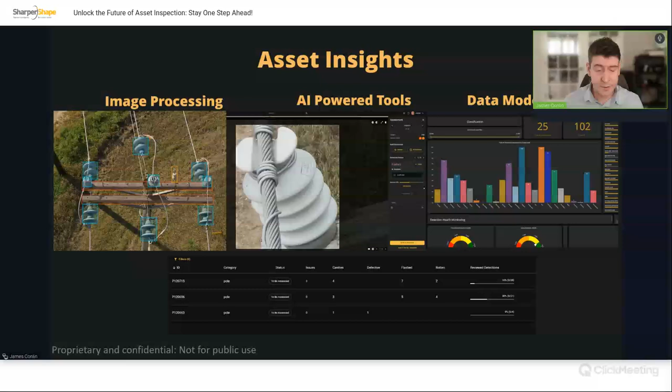All right, so here we can actually just get a little preview. You know, whenever you see any ML or CV models, you always want to see those bounding boxes. We have, like I mentioned, 3 sort of pillars here: image processing, tools for end users, and updates to the data model. And that Sharper solution sphere.

So here in Sharper Solution Land, we operate as a software vendor for some of the US and the world's largest IOUs, so investor-owned utilities, and smaller utilities, as well as their vendors. So if you are a drone service provider, you capture images, you're looking for a sort of end-to-end solution, you can lean on us to help you organize your operations, actually operationalize this data at a huge scale. We've got a really large offering. We've got a very wide and deep platform.

So it's nice to sum them up and think about them like this, I think. For workflows, these are tools that help utility workers and your vendors get jobs done. Key technologies are our utilization of cloud computing and our whole architecture that allows us to deploy complex data analysis pipelines at scale. And solutions for housing and structuring and accessing data. Realistically, almost all Sharper Shape solutions live in this section, a warehouse that stores, structures, and serves the data, as well as the actual interfaces that users deal with when they're accessing our platform.

But I do want to highlight it here because it's going to become useful. We are built currently on AWS, so it's not a huge task to roll it out somewhere else. We do have integrations with GCP and Azure coming soon, but right now we are AWS.

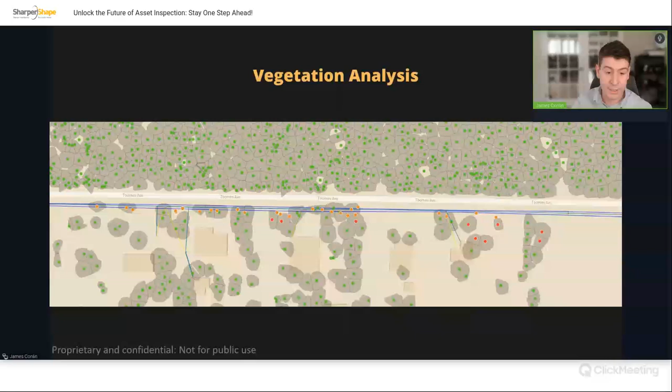So SharperShape was actually founded... We'll go one more and look at the key technologies. Yeah, SharperShape was actually founded out of the Geospatial Research Institute in Finland about 10 years ago. We came up with a proprietary algorithm for tree segmentation in LiDAR point clouds. So every green organic cell looking structure here is a tree. We've been used to deploying these models at enormous scales now for nearly 10 years.

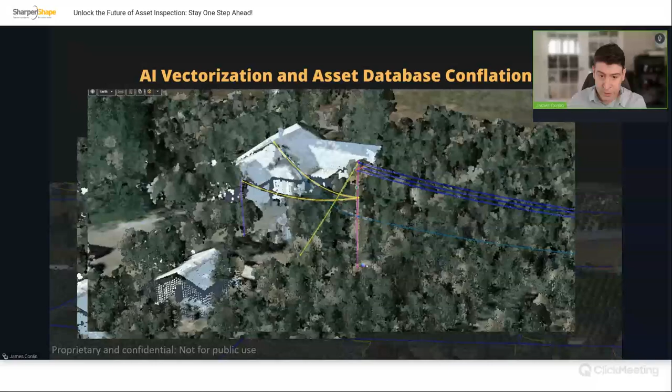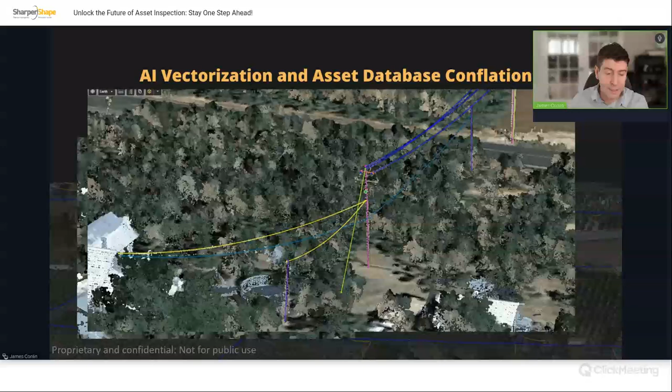And veg analysis, of course, goes hand in hand. Next, we came up with a solution in the auto-vectorization space. So for really fine-grained distribution assets, vector models that actually describe the as-flown shape. So you can see catenary wires, lines, service drops, even things like transformer attachment points automatically classified and vectorized.

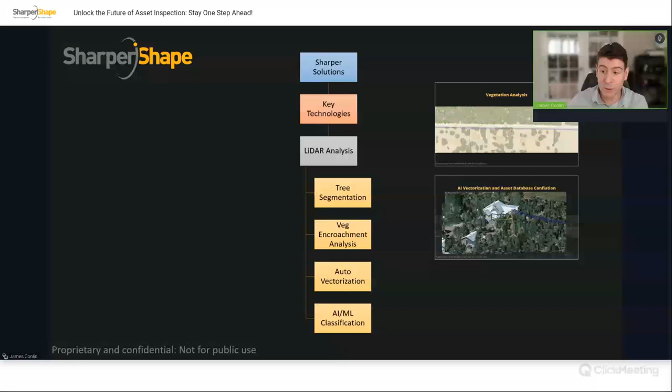Lastly, and this is where we get to show something really fun, we brought the Eclair machine learning classifier to not only our customers, but we released an open source dataset so anyone can use it to train their own sparse tensor Minkowski engine ML classifier for point clouds. And if you want to see how this looks at scale, this is something that's just always quite eye-opening for people if they've never seen this.

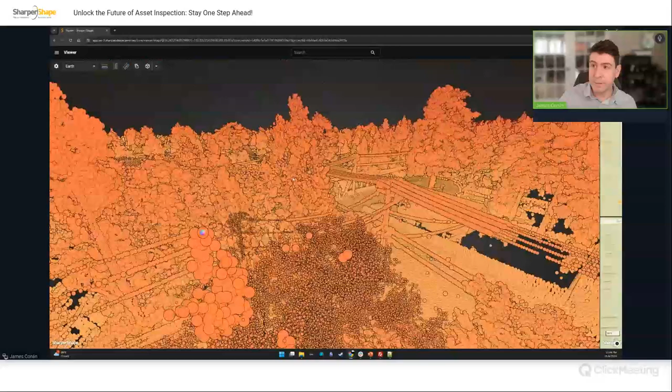So when your vendor or you guys capture a point cloud, you have just a bunch of points. Each one of these is an XYZ, right? A laser reflected off, in this case, a leaf, or over here, a power line, or over here, a house or a building. And what the Eclair ML classifier does is it separates all of these points into, I think, 31 distinct classes. When the points roll in, they're all homogeneous like this. There's some variation, but in general, they all can be visualized the same.

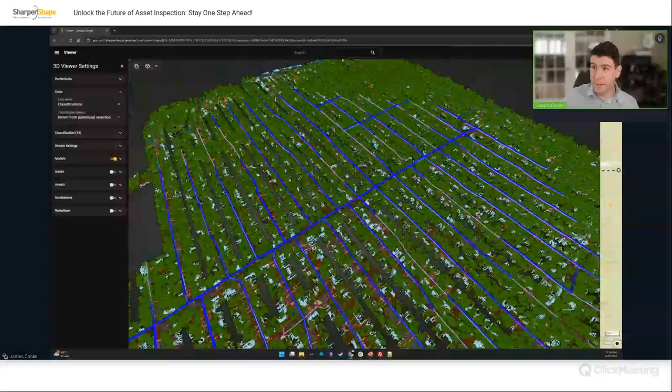When classified, you can actually see the Eclair point cloud classifier can tell the difference between primary and communication wire, can tell the difference between road and ground. Every vehicle is classified here. And this enables us actually to roll out really high quality auto vectorizers. So we can actually, at an unbelievable scale and level of detail, vectorize distribution network.

Go back one slide and take a look at the solutions for housing and structuring the data. So when you sign up with SharperShape, you get a core company. So this is your unique ID inside of the core ecosystem. All of your data is separated from every other company. And within your company, you have different projects. Your projects might be collection events. They might be business units.

You access them by going to WebCore. Some of your workers will go there. Some folks will use the iOS app that we build in-house. And advanced users soon will hopefully take part in using our API, which is a really robust and geospatially enabled API. So you throw in some geometry, you throw in the name of a circuit, and it will respond with all of the point clouds or the latest image that captures that location or that circuit. It's really flexible and it's really exciting. It's a joy to work with.

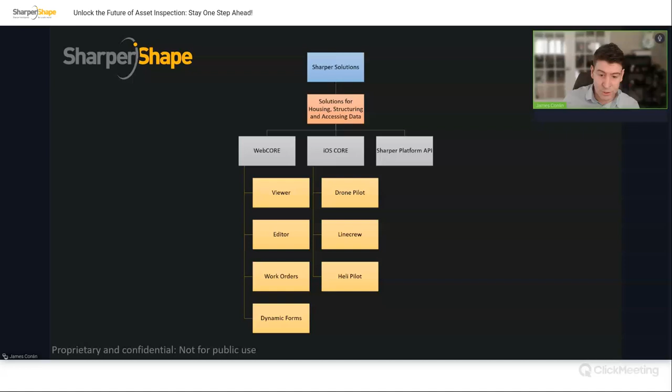All right, so this has been the lay of the land in SharperShape world for a little while. With Asset Insights, we're adding functionality to all three of these pillars. And we're looking to support our users and customers who are trying to deploy state-of-the-art computer vision algorithms trained for the sole purpose of fulfilling our vision for how ML deployment at scale should behave. Here's what we're adding, and this is what we're going to talk about for the rest of the day.

In workflows, we're adding powerful ML-empowered inspection tools and a whole suite of review tools that we'll demo live here. The backbone of Asset Insights revolves around our inference pipeline architecture, where in near real time, and I say near real time because it really takes about 20 seconds, all images are run in parallel through your project's inference pipeline. Every project gets its own pipeline. You configure it, you customize it. Results come in two flavors that we'll get into.

And then this is all supported by our detectors, which we're calling these objects detections. So an ML model with this name detected an insulator. And then another ML model classified this insulator as flashed or rusted or chipped or something like that.

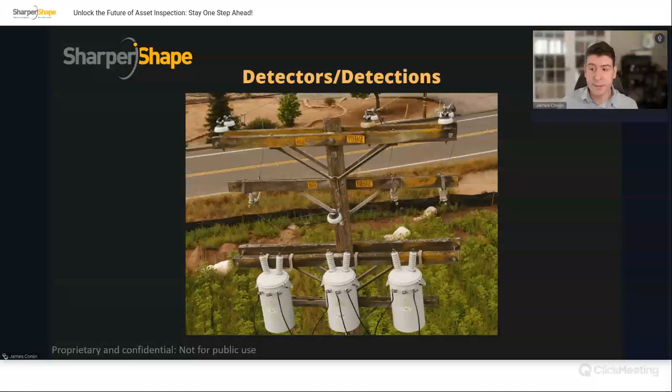Here's once again the whole platform. Asset Insights results come in two distinct flavors, and we'll actually go and talk about these now and what it means to use Core with these insights. When you upload an image to Core, the ML pipeline attempts to detect instances of each component in the image.

With one single image, regardless of whether it's from the ground or the air, our state-of-the-art model detects the utility pole and up to 26 different components. So with this image, all of a sudden, you get a pretty decent pole inventory. You got the 3 cutouts, you know how many insulators you have. You can even see some of these connectors up here.

Pair this with 3D modeling, and your pole loading or engineering and design staff can cut down the time it takes to actually do their work. These detections have a really full and useful system of references powering their data model that I'll get into later, which is super exciting. But for now, understand that each component relates to an image, and the asset that's captured in that image relates in two ways.

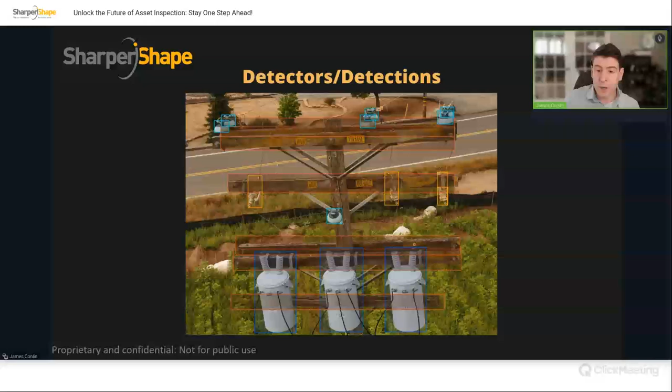It relates in terms of a database primary foreign key relationship, but also every time you upload an image to Core, we analyze the field of vision for that image. So we know where on Earth this transformer is.

The next flavor are classifiers. So your project will have multiple classifiers, and based on the component, these classifiers take your individual cropped bits of images. So we see we have three transformers from the last image, and then the simplest possible classifier just sorts them. These are healthy, these are not healthy.

And we have default models that ship with Core, and we'll talk about how exactly they work. Every transformer that's detected in an image gets sorted, right? They all get put in different bins. Here we have, of course, the classic defective looking transformer. It's very simple. This is an absolute best case scenario type of binary model. It would never be like this, but the framework is limitless in how expansive it can be.

We don't really imagine people sorting components into a binary group like this, right? Instead, what we see is a future where users in Core take part in enriching their data via inspections or labeling activities, where each component receives multiple results. So insulators are first detected in each image, and then each detected insulator is inferred upon to receive its material.

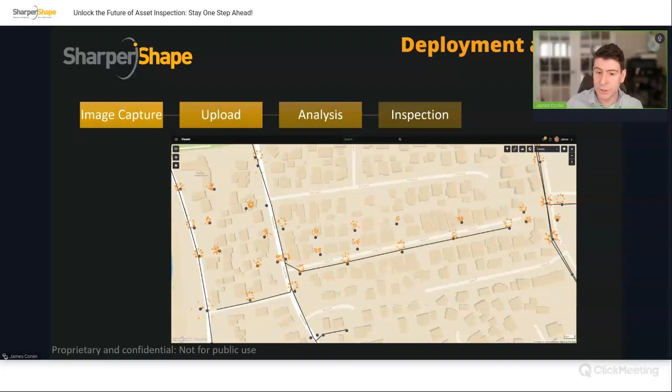So as images roll in the platform, they're geospatially analyzed and related to your network infrastructure. I wanted to show this picture. This is worst case scenario where your poles are not in the right place and your teams have to do the wonderful job of going out there and flying around a pole in reality and then figuring out how to conflate that data with that GIS database that's maybe drifted over time or was never accurate.

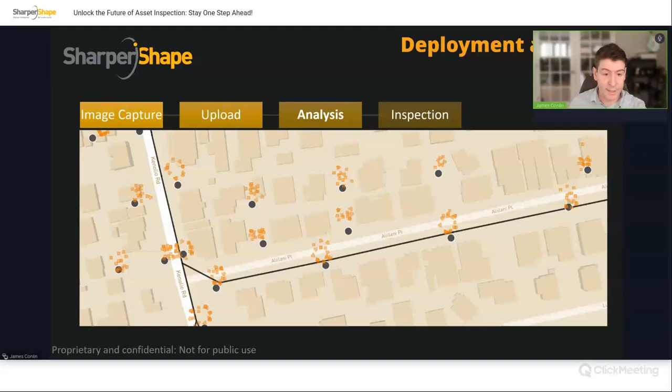So we have solutions for that as well, which is part of our DSP offering, or for utilities and large capture programs, their workers have tools to overcome this. And some customers even use these clusters of drone images for actual pole correction. So you can nudge the poles to be in the center of these clusters, and all of a sudden with drone imagery, you've enriched your GIS database from your remote sensing activities.

So I was going to show a whole end-to-end demo through slides, but we'll actually just go live into the platform now. But first of all, assets and their images enter a carousel for inspectors to look through. For every pole, the inspector looks at as many images as they need to make remarks on as many findings as there are. So we'll actually switch now to a live Core environment.

Let me find the window. All right, we'll jump to my location here in Gainesville, Florida. And when you stand up your own project, you probably want an extract from a GIS database, your GIS department, or if you are very brave and you've hired a vendor, or you are a vendor who's been told, go to this substation and walk west and fly around every pole, right? You have tools for digitization here. So what we're going to do is just duplicate a pole. I'll place it across the street from me, maybe two poles.

Now, this is WebCore. This is the editor module where you can take full control of actually manipulating the data that's in there. And just to be very nice, we'll take a look at an attribute table. This is just a default pole. We'll rename it to demo1. And we'll rename this one to demo2.

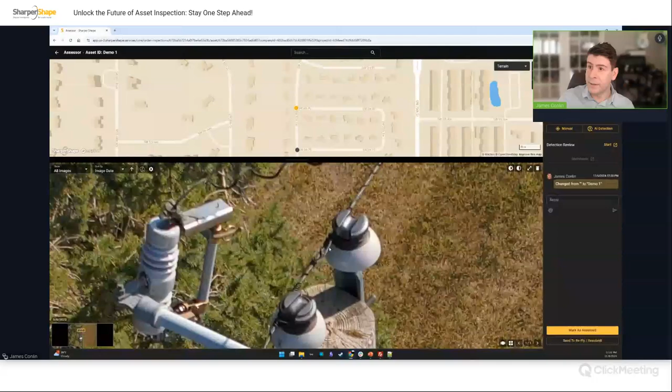The way this used to work, well, we only have one image. The way this used to work is that users come to Core and they scour the image. They're taking a look. Is that cutout broken? Is it open? The line has slipped off the insulator or something like that. The bolt's backing out. Maybe this insulator's got a problem.

Their old workflow is I'm going to click this. I find the issue. I circle it. I point here. I say it's really this one. I say it's an insulator and its condition is flashed or rusted.

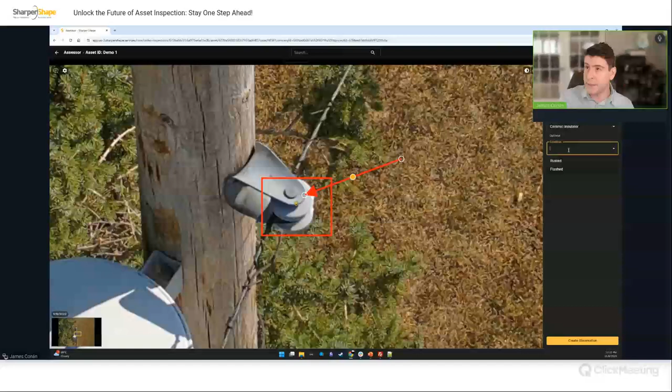The first tool we're adding to Asset Insights is actually an AI detection, just a time saver. So when you're making a remark, you've noticed that this insulator is broken, you're just going to select it. Have to refresh because the inference has just dropped. Yeah, I'm just going to select it. And now we just saved the small amount of time of drawing a bounding box. But when you're looking at 60 poles a day and you're marking up 10 issues per pole, you're saving 3 or 4 clicks per issue, and you're getting your work done faster.

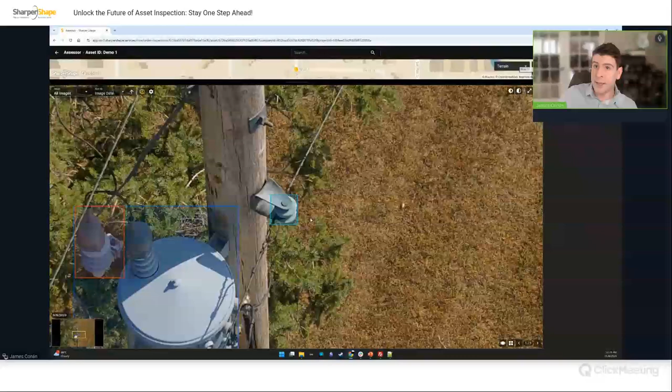Now we'll do that again. We'll actually use this transformer. Oh, no, we'll use something else. We'll use the insulator again. We'll use this one. We'll say it's flashed, sure.

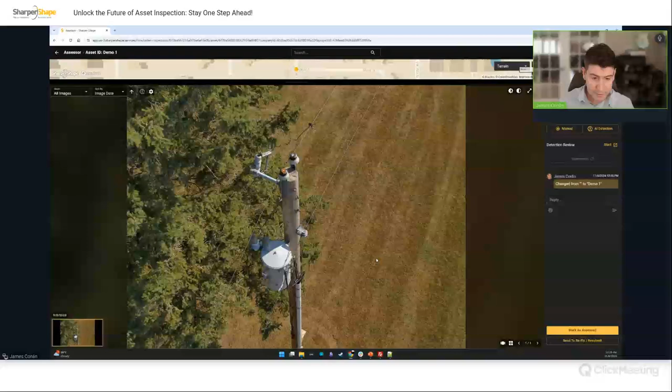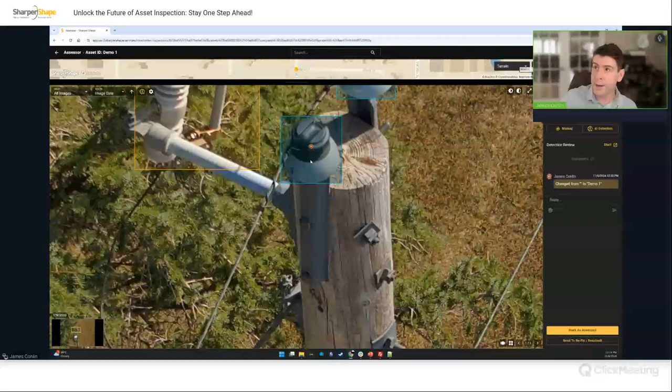Save our issue. And now the data model behind the scenes understands that a human inspector has taken our ML label. You guys saw that it took a minute, maybe not even that, took that ML detection and created a condition that's related to it, which when you find 1,000 flashed insulators and you relate them to these detections, creates a pristine data set for training your specific flashed insulator model.

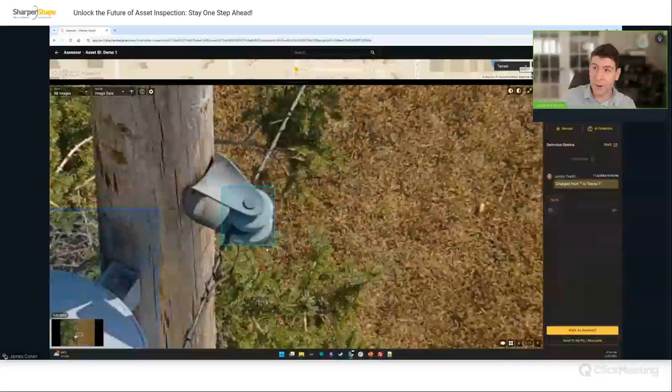So maybe you have different kinds of structures, maybe you have different kinds of poles, you have a unique sensor you're using to capture the images or a different shot sheet. The quality of these component detectors is high enough that we can happily rely on their accuracy to create training data sets out of them.

And then over here, if we actually come and have a look at what we have, our first pole where we found one issue, that is actually paired with the second pole in the order where our models actually detected faults. So at this point, if you're an inspector and you show up to your work order, when you start working, do you prioritize working on the pole that has no detected faults or the one that has 15? I'll go for this one.

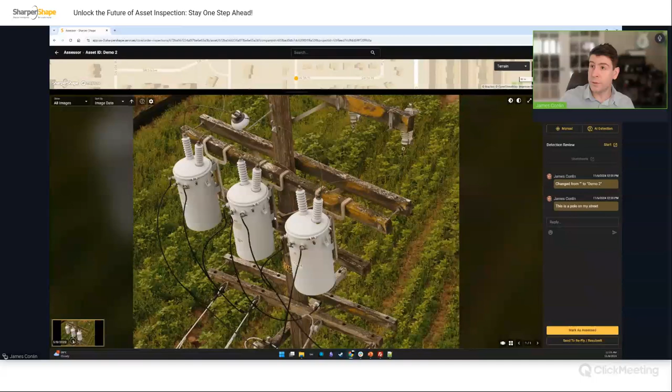And this actually is a nice segue into our review suite. So once you actually have detections that are unhealthy, you have access to this review workflow where every component will... actually go to something smaller because it's a little more powerful. There we go. Where users don't even have to now scroll through the image. Users can simply use this conveyor belt.

And if you think this is flashed, and I'm not saying what you want to do is spend lineman or line worker time on this. If you think this is flashed, you confirm it. And that creates that issue. If you discard it, well, guess what? We just had a false positive. Your version of this model that will deploy after a certain epoch or a certain amount of data rolls in, your model is now being corrected on your network.

So for utilities, maybe you don't have labeling teams. Maybe you do have a team of digitizers and labelers, maybe offsite. We see this a lot. Your team can utilize this along with the inspection data. They can remark on these findings, create new issues, or something that is particularly problematic, right? You can't have the same thing flagged in SAP or in your system of record twice. So if you confirm a detection, actually I've already created a detection for that, all this does is it inertly tells us that, yes, that is a correct issue that we've detected.

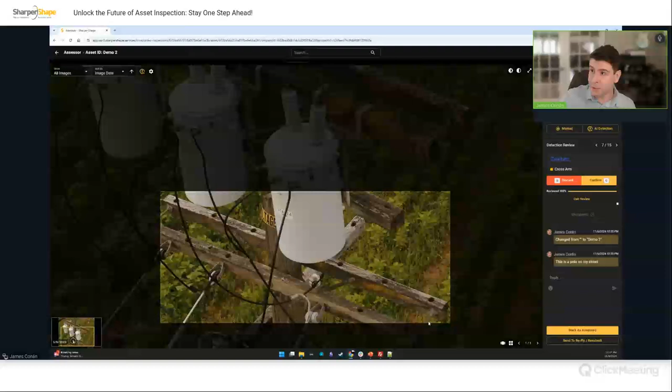I will say you must take part in a refinement process to get high quality results from the classifiers. Vacancies is actually spot on. It will detect every cross arm that has open positions available. That may or may not be valuable to your organization. The project that we undertook in order to train them suggested that for some utilities it is a necessity. Okay.

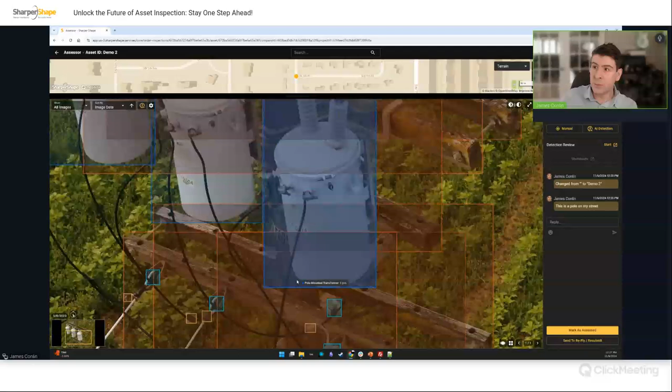And of course, so end to end, I'm just skipping through all of the things where we actually covered it live. Oh, and actually we didn't take a look at that pole and all of its inferences. So yeah, I dragged and dropped a single image into Core and we got 3 transformers, we got 2 insulators. It actually did miss a cutout, but again, we have tools for being able to draw your own and then create a data set. I don't know if that would be a good picture for a cutout anyway. Bunch of different connectors. So we're really down to super fine-grained small elements on these poles.

So from image capture, upload, analysis, inference, and inspection, you can see that users are actually taking part in an end-to-end pipeline that handles these images, right? They are JPEGs, PNGs, hopefully JPEGs though, because that's what most sensors are creating. They become highly optimized. One thing we didn't talk about is that as you cycle through images in Core, they will load faster than you can get them anywhere else. We've got a bunch of tricks and a ton of time invested into how fast we can load imagery.

You end up with all of these components that are detected. And as your workers take part in a regular inspection project, they end up with issues and inspection results. The way we see it is that we're adding to this pipeline. So all of those inspection results still go to engineering. They still reduce the risk. But for free or nearly free as a side effect, you end up with a really exciting and useful training data set that can be used to train the next generation of models that are really honed into your network.

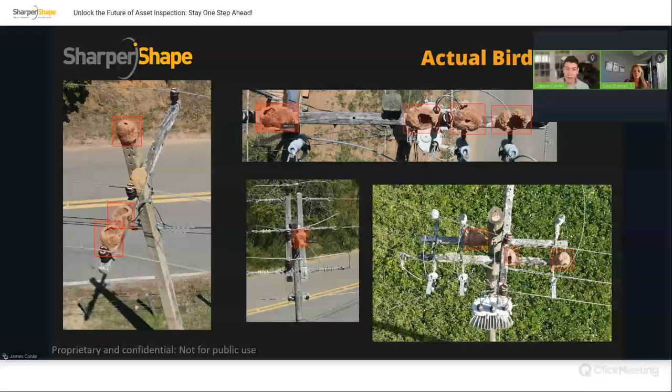The same model with data that actually fits its purpose works really well. So you have to think of these models as a machine that will make a decision for you, but it only knows the data that's gone into it. So if it's only seen this specific type of bird's nest, then every time you have a bolt that it decides looks like a bird's nest, you're going to get bird's nest detections. So,